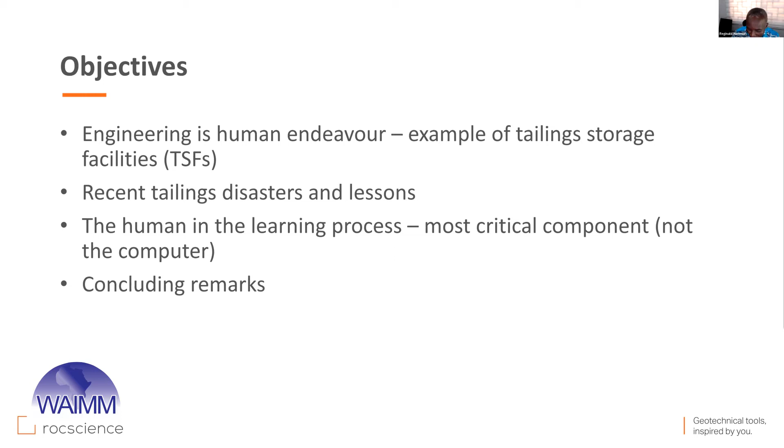And therefore, we need to get us engineers doing the right things if we are to learn from this and ensure that these things don't happen, and that in our own motherland, we will be designing and maintaining these facilities in such a way that we do not experience any disasters to begin with. So that's what we'll be talking about today.

And several of these concepts that I'll be sharing come from a gentleman known as Henry Petroski. He's written several books on engineering.

Now, one of the things he says is engineering is a human enterprise. It's a human activity. As a result, it is subject to mistakes. We can make mistakes. But engineering also significantly improves our lives, and even the technology we are using right now to communicate. In this era where, due to COVID, we do a lot of things online, engineering achievements allow us to do that. But every now and then we experience some failures, and those things can bring a lot of our activities into question.

Sometimes these mistakes are only small, they are irritating, but nothing more than that. But there are times where they cause deaths, and TSFs have caused some fatalities, some catastrophes. So we need to talk about that. The question is, can we learn from these experiences?

And again, like I mentioned from the beginning, the focus will be on us as humans, as engineers participating in designing and constructing and maintaining these facilities. Is there anything we can bring to the table that will help us enormously reduce risks of failure?

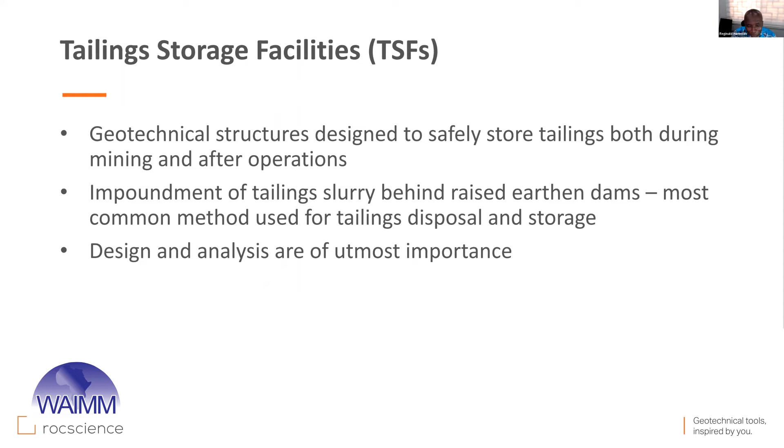So these things go in as a slurry, as a wet mixture, and then they are stored. That's the general technology used around the world. And for these things to maintain their safety, to store all that waste safely, their design, analysis, construction and management are all extremely important. But today we are focusing more on the design and analysis components.

I described right from the beginning that this material is a slurry. It goes into the storage facility wet, liquid. So you can imagine trying to build on a liquid might not sound like a very good idea. But there are ways of ensuring that the coarse materials stay close to the dam face and are strong enough that we can build upon them.

And that's the upstream method. We'll come back and answer why this method was, or is, the most popular. It has been very popular for many years. We'll see why. Then there's the downstream method.

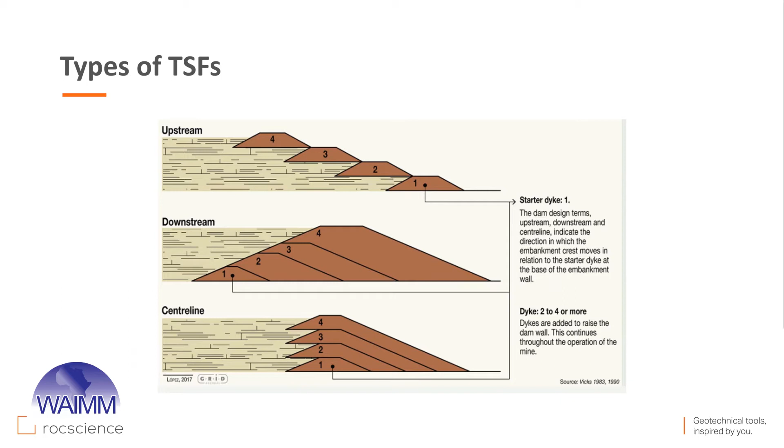The middle ground between the upstream and the downstream is the centerline construction. The center line of the dam does not change. Similar to downstream in some sense, we keep encroaching on more land as we build, but not as much as was the case with downstream. At the same time, it offers more stability than the upstream.

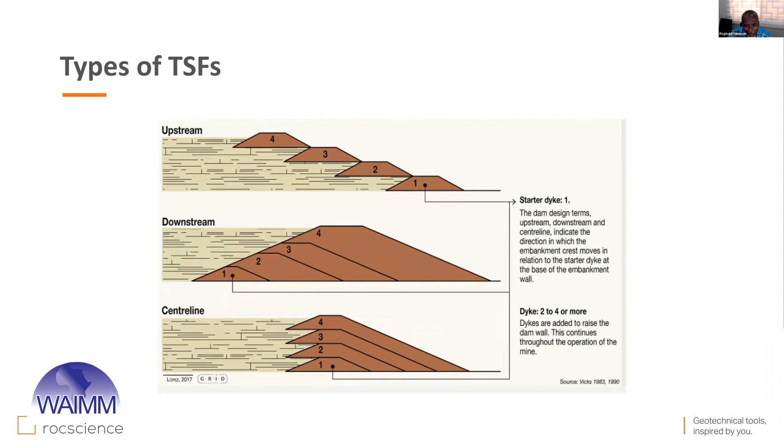So these are the three most popular means for building TSFs. The upstream method is very simple to construct, it's cheap, because the amount of earthy material you have to move to build a dam, you see in the raises, is much smaller than for the downstream or the centerline. As a result, it's very popular.

However, they are also known to be the most stability challenged. Most of the failures we have experienced with TSFs have come from those built with the upstream method. So you can imagine it's becoming less popular in today's world, but it's still used, and there are many legacy structures that were built with the upstream method. So no matter what we do, we still have to deal with them.

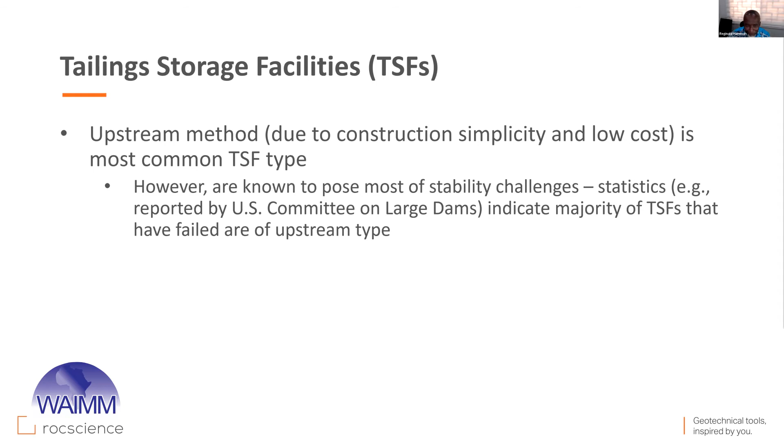Now, TSFs have failed, and we'll look at a few examples. The frequency of TSF failures is about 100 times more than that of water dams, which raises a question as to why these things are happening. And when they fail, they can severely impact the environment, and they can also kill people, causing fatalities.

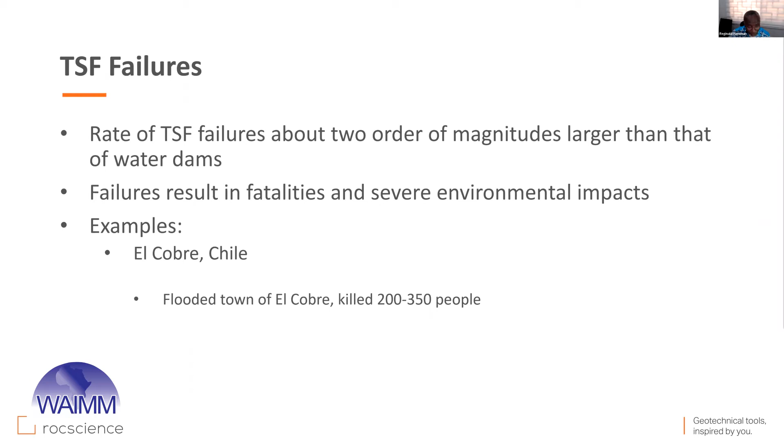So let's look at a couple of notable examples. There are several, and even in recent memory there have been a few. We can't describe all of them, but just to give us a sense of why the human factor is so important in engineering these facilities.

El Cobre in Chile in 1965: an earthquake hit, magnitude 7.4 or so, and the TSF failed and flooded the town of El Cobre, killing about 200 to 350 people. Censuses were not kept well, so it was not known exactly how many people lived in the town, but it's estimated that 200 to 350 people died.

Engineers learned from it. They learned to flatten TSFs, compact the tailings, and make sure the raises, since it was an upstream dam, were built on more solid ground. To do that, the technology of cycloning was used to separate the tailings into fines and coarse material, making sure the coarse materials are near the face of the dam, and future raises are built on these coarse materials, not on the fines, which are also known as slimes.

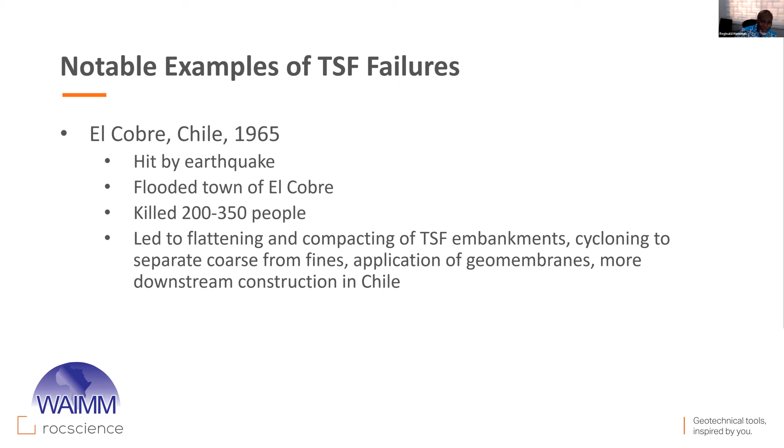As a result of this failure, the use of geomembranes was introduced more into TSFs, and then in Chile they switched more to the downstream construction. So something beneficial came out of the disaster. These were some of the lessons learned.

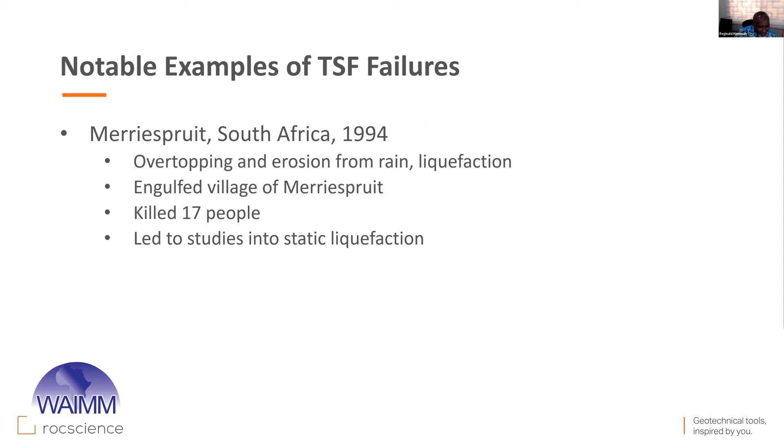In 1994, on our own beloved continent in South Africa, Merriespruit, there was a tailings failure. What happened was excessive rainfall. There was not much freeboard in the TSF, so the water levels went so high. It overtopped the dam, eroded part of the dam, caused the tailings to liquefy and flow into the village. 17 people were killed, and infrastructure and lives were badly affected.

Very recent ones, 2015, Brazil, Fundão Dam. It overtopped and it liquefied. This was caused by rainfall. So you can see that rainfall is not a best friend of these structures. Extensive environmental and infrastructure damage. And 19 people died. But the main thing about this disaster was the amount of tailings that went into the environment and damaged it.

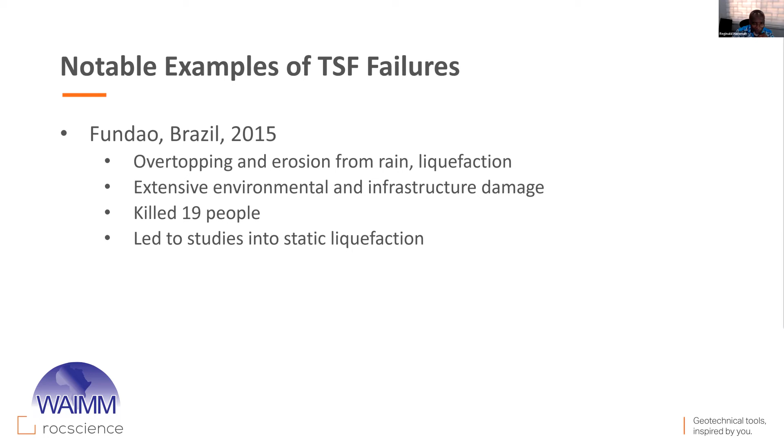Okay, now let us go to the most recent, Feijão, again in Brazil, January 2019. Now this disaster killed about 270 people, extensive damage to the environment, to infrastructure. This is one of the most widely documented failures because it happened in very recent times. There are even videos you can see. Maybe after the talk, I can come back and show you a video. I have a link to it, but I might not do it now.

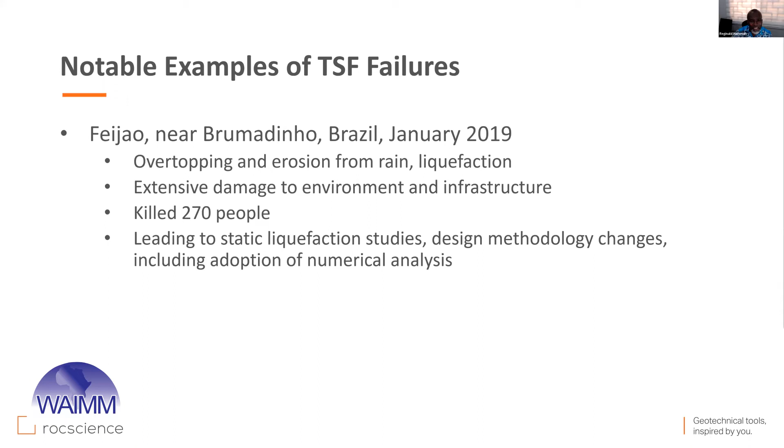But it has led to more studies on a phenomenon known as static liquefaction. We are changing the way we design these TSFs, the way they are drained, the way they are managed. Several things are coming in to ensure that this disaster does not repeat itself. So all those initiatives are great, and they are moving technology forward. But what we will see is that human factor. If we don't work on it, we will not have as much success as we should. In fact, we may not experience fewer failures, but probably even more failures. The human factor is that critical. So we'll be discussing that very soon.

If we do our engineering well and we behave responsibly, failure can lead to success. But like we said, that will happen only if we learn. And we can do that by thoroughly investigating accidents when they happen. If we do that, we can learn from failure. If we do that, failures just become real world experiments. Not that anybody wanted that, not that anybody wanted the negative impacts, but once it has happened outside our, let's say, choices, let's make the best out of it, learn from it.

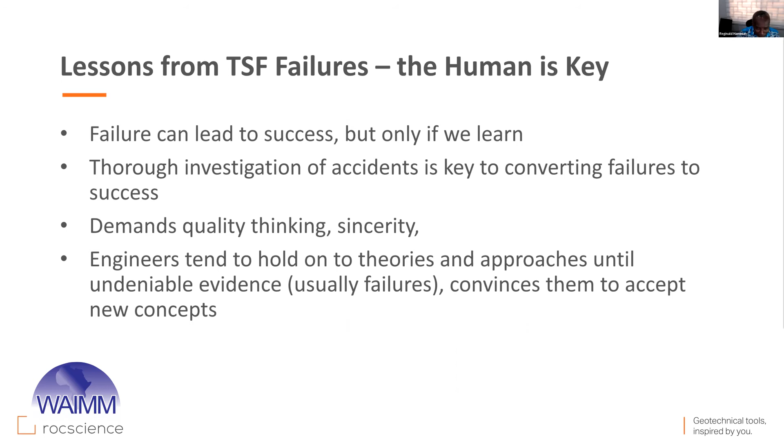What happens when there are these disasters is that we investigate them. Sometimes we think that we have discovered all the possible means of failure, so we can anticipate them, but that may not be true. So it's very important, that's why I said we have to be sincere. We have to be creative when investigating these things. Sometimes we are not sure what exactly caused the failure. If we focus on a likely but not the main reason that caused the failure, we can be deceiving ourselves, which means we have the chance of repeating that failure.

Sometimes we just ignore some of the biases we have. And what we are saying is, as humans, we have to learn where these biases are and watch out for them and overcome them in our engineering.

If we do that, then failures can contribute to actually advancing the state of the art, advancing science. Like we said, failures are accidental experiments, but they can contribute to our knowledge. So once failures happen, for young engineers, and in fact engineers of any age, I always encourage us, let us learn from failure. Let's read a lot of forensic reports, books on past failures. It will actually enhance how we do engineering.

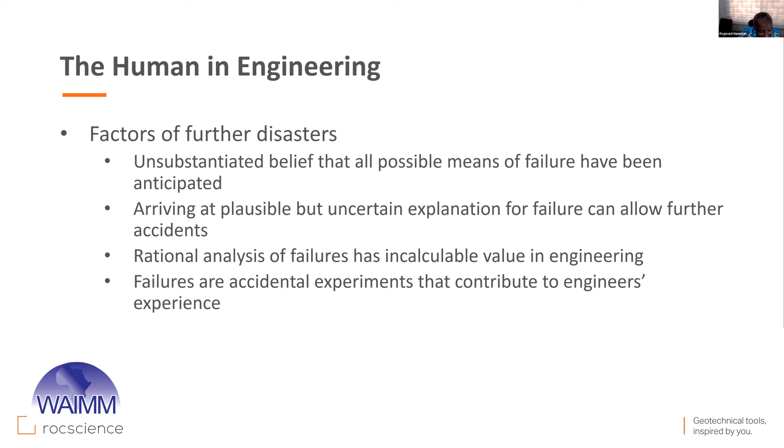Today, we rely on computers a lot. And I work for Rocscience. We are a company that sells software. So we are heavily into the use of computers.

But that does not mean we don't recognize the dangers of removing the human being from that process. The dangers of thinking that computers can do all the work for us. Because computers work so much faster than our brains can work, they solve, you present a model to the computer, it will do way many more calculations than we could do, any one of us could do in our lifetime. It develops the temptation for us to try and solve everything with computers.

Forgetting that the models we build, all these things we do, involve us. The computer only does what we tell it to do. It's not by itself designing a tailings storage facility. It's doing what its human masters have told it to do. It just does it very fast and presents results in ways that we are not able to do before computers.

So what happened was, before computers, as humans, we knew our limitations and we wouldn't go in for super complicated designs. But now we do, because we can. And sometimes it leads to us coming up with designs that are so complicated, we as humans do not really understand them. We do not know what their outcomes will be. That's where the danger starts arising. And that's why we need to think through things carefully.

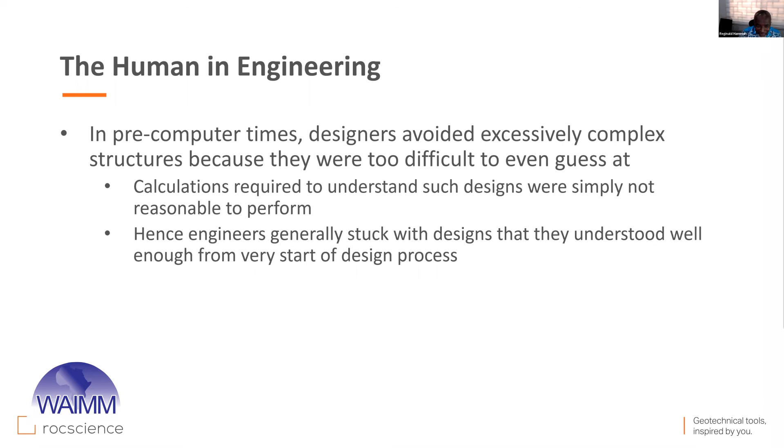But therein lies some of the problems we face today. The fact that we're not using computers in the past does not mean that past engineering was not good. It was actually very good. That's why we can learn a lot from our past and from paying particular attention to the underlying theorems, the underlying principles for designing the things that we work with.

We use computers, but what happens is we can oversimplify the problem, and so the problem we specify in the computer is incomplete. As a result, it can lead to unpleasant outcomes. The computer only does very rapid calculations and then presents lots of information to us. And sometimes we contour into very beautiful pictures.

But if we as engineers do not understand what we are doing, we don't have a feel for how a TSF, for example, should behave like when it's designed. When the water table goes up, what do we expect? When we raise the dam, what do we expect? When we increase the slope angle or we decrease it, what are the effects? As engineers, we must understand all of these before we start using computers.

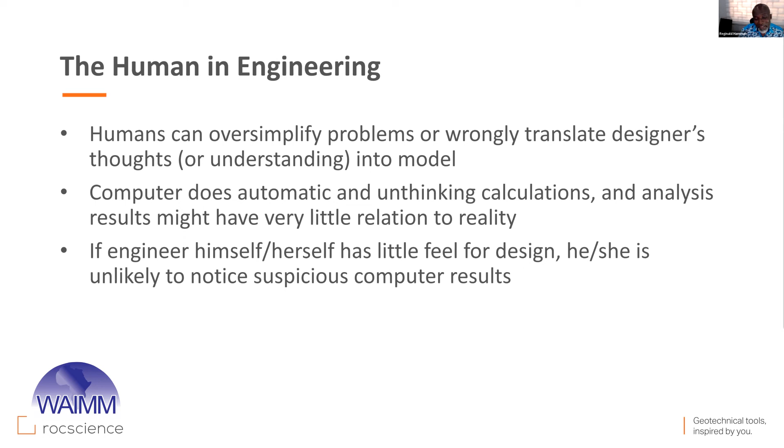Otherwise, we will not notice results that do not make sense. And just because of pretty pictures, we think we've done a great job, and then we lead ourselves into trouble. So for us, Rocscience, we spend a lot of time actually training people because we know the human factor is a critical component to all of this work that we do.

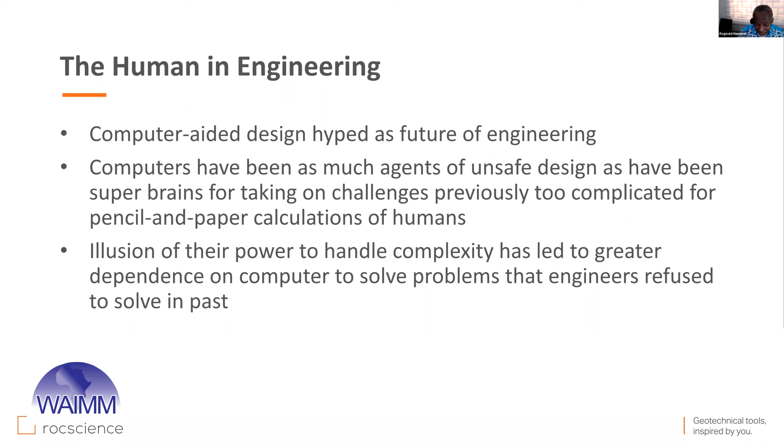Computers are being hyped as the future, and so we've been using them. But we forget that sometimes the fact that they can handle a lot of calculations and complex models does not mean that they are solving things right. So it's very important that we know what we are doing, even as we use software.

It can calculate things much faster than we could do with a pencil and paper. But when we used to draw and do things like this, we were immersed in that whole problem-solving process. And we can do the same with computers. It's not like computers automatically take away our ability to do that. Actually, they can enhance that. But we as humans must recognize that and focus on it, even as we use technology to do our work.

So even artificial intelligence, I don't think is going to solve all the problems. I don't foresee a time where we just throw problems at computers and we sleep and it comes up with answers and we just use them. Computers are just fast calculators. We are the people who do the thinking, and we have to use computers as a tool.

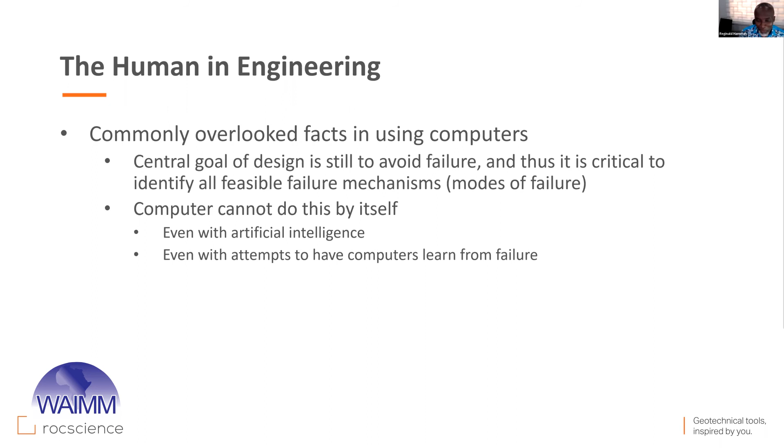When we are building or designing things with our tools, computers, and other tools, it's very important to ask questions while we're using them. What are the potential failure modes? What will happen when I raise the dam? What will happen when I increase the angle? What will happen if I apply a buttress? We have to be asking these questions, and they can be posed in computer models.

But whether we actually ask the right questions depends on our own engineering judgment. So again, you see the human factor we cannot take out. The computer is only doing what the master, the human, is telling it to do.

Unfortunately, sometimes we almost elevate the computer in the office to the role of an assistant engineer. I'm saying that's very dangerous. The computer is not an assistant to the engineer. You are the engineer, the computer is only a tool to help us design these things.

So we cannot learn from previous failures, or whatever we learn will be quickly eroded if we're just throwing things into computers and not spending time thinking through them. Very important for us to do that. They only answer the questions that are posed. If you ask the correct questions, you get the correct answers. If you ask the wrong questions, you get the wrong answers.

Very important. Now, because they give us a lot of precision, you can get so many decimal places. Sometimes people mistake that for accuracy. It doesn't mean the answer is accurate. It could be a wrong answer computed to many decimal places. It doesn't make it right.

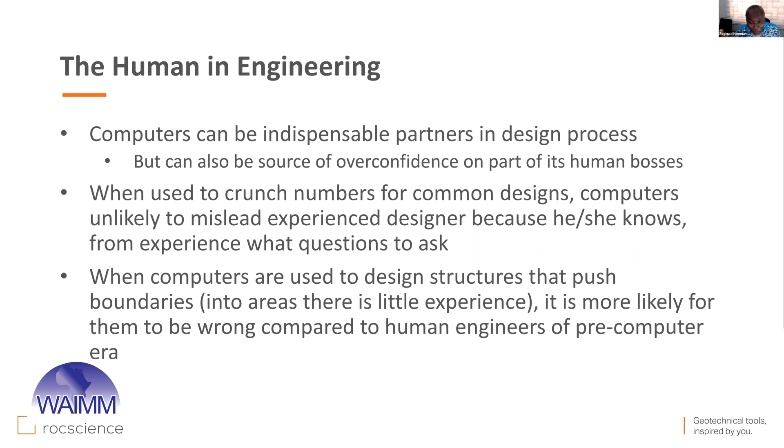They must put in the right information. If we do that, then our number crunching will be useful. And then we can even push designs, the boundaries of design, without exposing ourselves to risk. Very soon we'll see that innovation always incorporates risk. And that is why it's fundamental that as humans, we strengthen our knowledge of principles that we use in engineering, not lessen them and just rely on the computer.

That would be a big mistake. Computers are here. We are not advocating for people not to use computers. Absolutely not. We can do a lot with computers. After all, we are using computers right now as we speak to communicate interesting ideas.

But what we want to emphasize is they are only tools. What happens is sometimes software, in fact in many cases, is not developed by design engineers, practicing engineers, construction engineers, people who are dealing with the actual structures in the field, the day-to-day behavior of these structures. It's built more by theoreticians, software developers who have a more mathematical or programming background. So that disconnect can lead sometimes to our software tools not offering what the engineer needs. But that is why we do our best to work with the everyday engineer to make sure the software has what the engineer needs.

And we also call upon engineers, when using software, to ask critical questions. Don't just believe the computer because it calculated something for us. Computers can make us do a lot of work quickly, but that is no substitute for knowledge and experience. We must develop engineers who, as engineers, can look at models and say, I don't believe these results. Challenge the models, get us to critically review it.

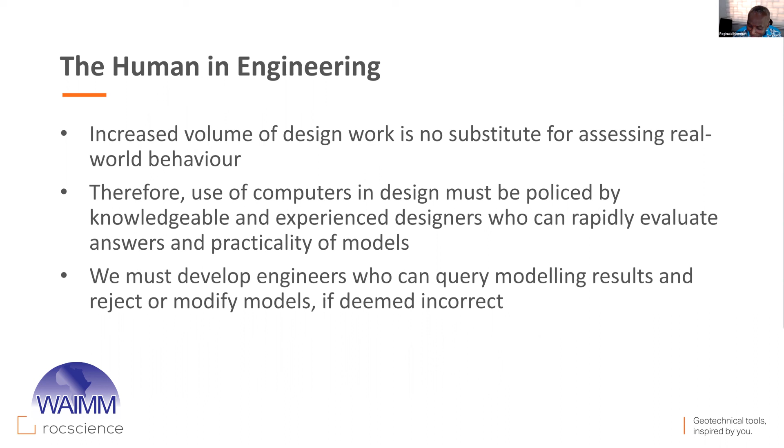And more often than not, you realize that somewhere in the model building process, somebody mistyped a number, or did not add an important factor. All of these things can come out, but that's what the human can do. So we must use computers very wisely. They are a tool to help us.

Now, let's look at categories of failure. A gentleman published a paper, and if you're interested, I can give you the full reference. His name was McKaig. He looked at a vast number of engineering failures and looked at how to categorize them. One category was ignorance, where the designers were either incompetent, or the construction engineers were incompetent, or inspectors were incompetent. But ignorance - that human factor was there.

Sometimes people who had responsibility did not have the necessary intelligence to go with the work they were doing. This is one of the causes of disasters. Sometimes it's economy, we are trying to cut costs in maintenance or construction, and that catches up to us.

Sometimes it's mental lapses or carelessness, where we are not careful what we do. And this can happen even when we use computers. We can be careless and enter incomplete information or errors that give us predictions that do not match what the real world is. So it's important.

Sometimes we get unusual occurrences like earthquakes, hurricanes, typhoons, fires. These can also impact.

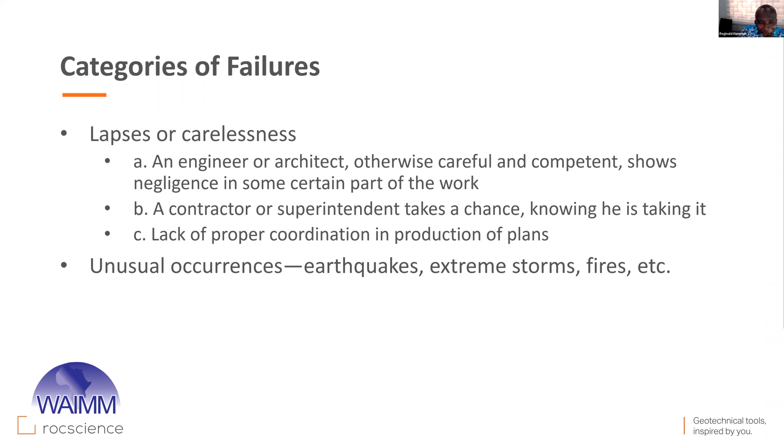But you will have seen that most of these errors had to do with the human. Lapses or carelessness, human. Ignorance, human. Economy, we make those choices, human. So the human factor is huge, and we have to recognize that.

Now, what we understand, in the past we understood this very well. When we use computers, sometimes - I'm not saying all of us - but in doing so, we almost forget what tradition is about. There have been traditional ways of doing things, and we shouldn't be too quick to just discard them.

Because of a long history with a particular way of doing things, we may realize that we have a lot of built-in knowledge. So when we use that design, it has got some safety margins built in. It is safe. When we try to push the envelope, it's very important that we understand what we are doing. Otherwise, we tread into territory where we can be surprised by failures.

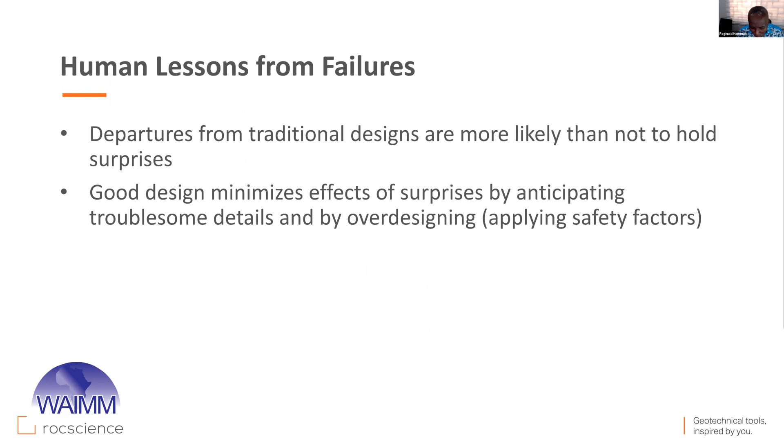So it's very important. Let us use good design. Let us think things through. That is what the human is expected to do.

And there are successes that show it's not only experience that allows us to get our designs correct. Mankind landed on the moon without having ever been there before. So that tells you we can design things ahead of time, but carefully and critically going through all the aspects allows us to enjoy success.

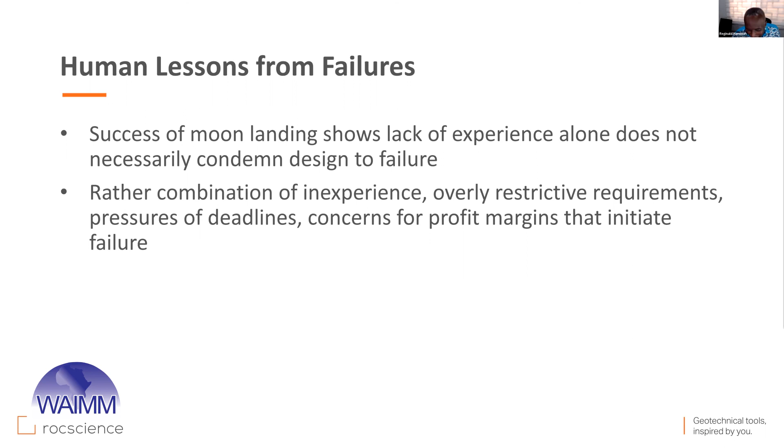What we are saying is it's more inexperience, sometimes pressures of deadlines we saw, cost, those lapses that we saw - these are the things that often lead us into disasters.

So as we are saying, innovation does not mean we'll fail. We should innovate, and there are many examples of successful designs. But we need to exercise cautious thinking. So that human factor is very important.

We just wanted to disabuse people's minds of blindly using computers and expecting to be doing a good job or a great job. That's actually a terrible way to approach it. We should be using computers as tools that help us do the work, but we are doing the thinking.

Anytime we innovate, we are taking on risks, is what we are saying. Sometimes we are successful, and when we are successful, Petroski puts it that the engineers who are successful are called heroes. But when your designs fail, your innovation fails, then you are called a goat.

Now, we are going to take risk, and life just means taking risk every day. You've taken a risk just to be online to participate in this session.

Now, if an engineer prepares well and does everything that a reasonable engineer in his or her shoes will do, you have not been irresponsible. Even if something goes wrong and it is investigated, you are likely to be vindicated.

But it's the engineer who does not prepare well to do their work, who does not acquire the necessary knowledge, or makes the same mistake that has led to failure before, and just repeats it - that's the engineer who has acted irresponsibly and can be held accountable.